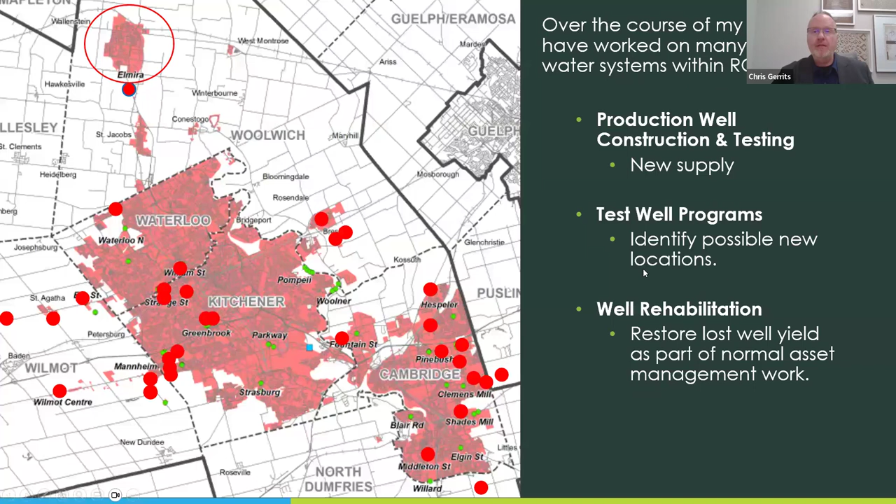With this slide, I just wanted to have 3 takeaways. If the presentation ended right now, this is what my takeaways would be. First off, we need to continue to use the 2015 safety factor in the interim to allow for development to proceed - that's what we all want: unfreeze, lift the freeze, and allow development to proceed.

One of the reports identified a problem being that the Middleton system didn't have the pressure requirements to connect and service the Mannheim service area. So the second recommendation would be to quickly reestablish that connection so you can count on Middleton as a backup, which will help alleviate some of the capacity pressures. The third recommendation would be to continue work that is planned and ongoing to restore capacity and add new system capacity.

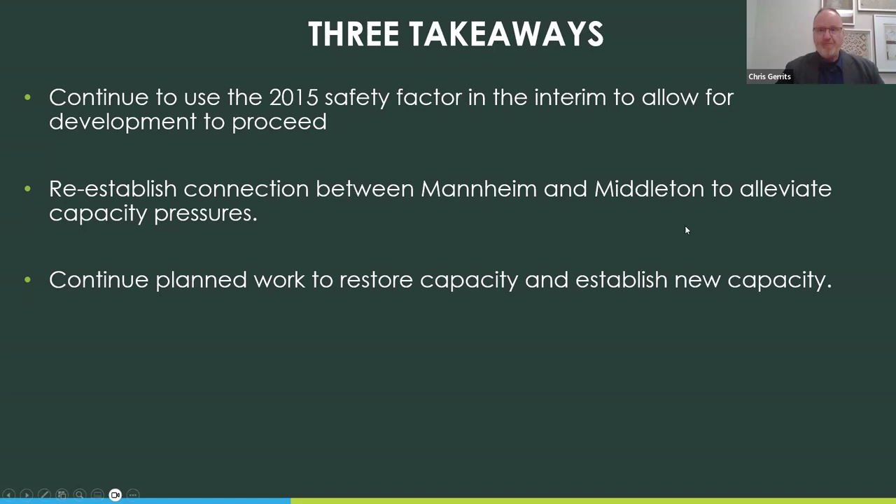Next up, I wanted to talk about the Waterloo system, because there's a lot of messaging going out from various sources that the region of Waterloo water system is one of the most complex systems in the province, country, world - I added that part. It is a very complex system, but the architects and designers of the system designed it that way. It is complex in that it has a number of wells, a number of interconnection points, and it uses some groundwater and some surface water.

But that was the idea - so you don't have all your eggs in one basket, you have options. They've got ASR wells, the aquifer storage wells. They take water from the Grand River when there's capacity, treat it, and inject it into the aquifer to help restore aquifer levels. That is a pretty unique solution, something they're very proud of and should be very proud of. So it is complex, yes, but it's complex by design.

I just wanted to compare the Waterloo system to a number of other systems. The Waterloo Integrated Urban System has a surface water treatment plant, the ASR wells which are the storage and recovery wells, approximately 75 production wells, 5 water treatment plants, and about 153 million liters per day is supplied.

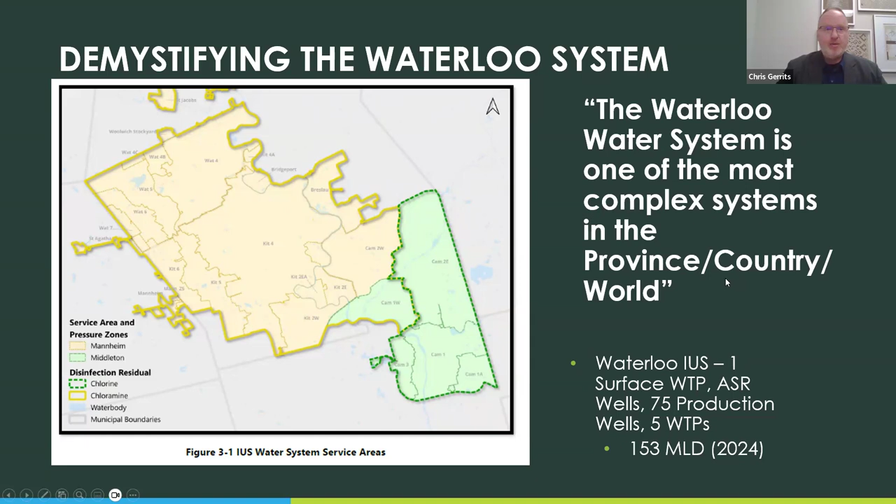When we compare that to York Region, it has multiple surface and groundwater sources. The York water system takes surface water from Lake Ontario, treats and distributes to many municipalities, some of which are blended with groundwater. The Georgina system is a standalone surface system taking from Lake Simcoe, and then they have 5 standalone well-based water systems in 5 municipalities, using about 336 million liters per day as of 2022. So a lot of similar attributes to the Region of Waterloo system.

The added complexity here is there isn't the benefit of a lot of interconnection. You've got standalone well-based systems that, if something goes wrong there, can't cross supply from another system. Georgina is standing all on its own, so it also has a lot of complexities, and it services a much larger population.

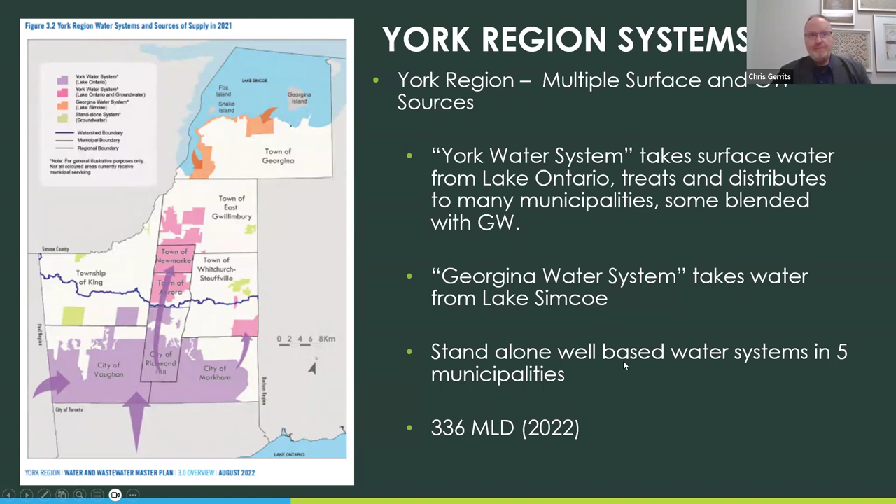Similarly, Peel Region has 2 surface water treatment plants coming from Lake Ontario, one for Mississauga, one for Brampton, and it has 4 groundwater systems - Inglewood, Caledon Village, Caledon East, and Cheltenham - that serve 10 municipalities in the town of Caledon for 599 million liters per day. Again, multiple sources. This one doesn't have the mixing of surface water and groundwater, but it has standalone systems that aren't interconnected, so there's more complexity there.

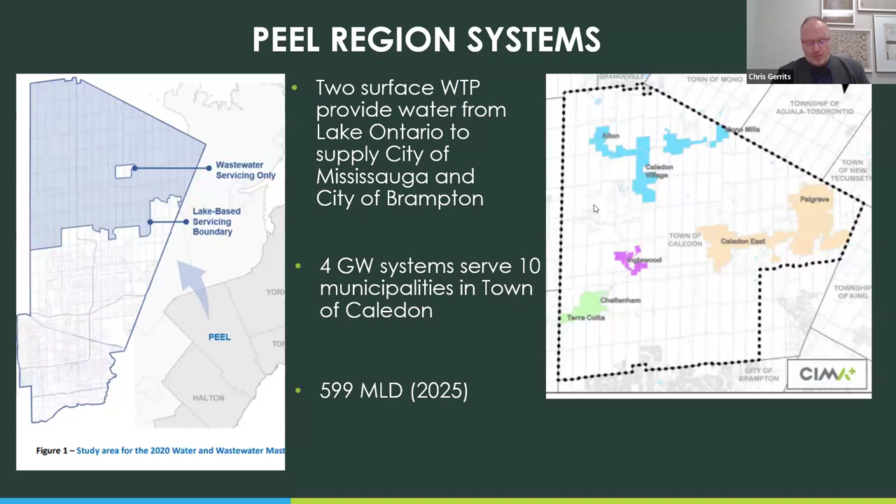So where are we now in the water crisis? In December, the region announced they had a capacity issue. In January, they confirmed their findings through a third-party review. In February, they approved the side stream treatment for Mannheim water treatment plant, which if you're following on social media, you'll see council had a tour of that this week. On April 8th, they revoked the 1980 Wilmot policy, which is good - it allows them to transfer some additional water from the Shingletown wells to Mannheim. But as of today, development is still frozen and no new capacity has been added to the system, although there's a difference of opinion on that, which we can get into later.

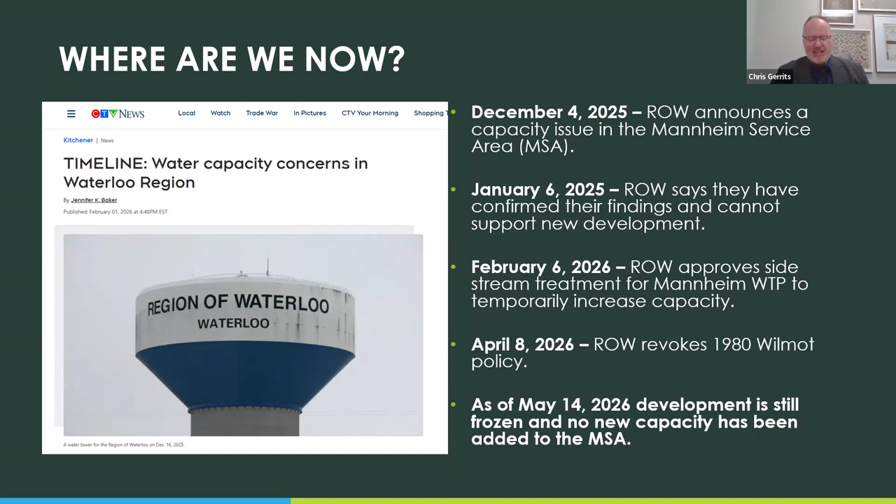I've identified the current issues as 3 separate interconnected issues. The first is the proposed change in water management philosophy. Second are the infrastructure and operational challenges, and third is the local water level concern.

So first, the proposed change in water management philosophy. I use the term proposed because the Region of Waterloo adopted their 2015 Water Supply Master Plan, which contained a philosophy on how they're going to apply a safety factor. At that time, they adopted the required surplus capacity, which said you take your average day demand, add 20% on top of that, and that's what you'll consider your demand for design purposes and to figure out what capacity you have. So you've got a 20% buffer added on top of average day demand as your safety factor.

This graph shows the 2015 Water Supply Master Plan showing a potential deficit by 2051 if they didn't do anything, if they maintained the existing sources at 193 million liters per day with the 20% buffer added. They identified a number of projects to be implemented from 2015 through 2051 to address that, including 20 million liters a day in capacity restorations, the Waterloo North Treatment Plant, and wells to add 6 million liters per day of new capacity, and 2 phases of additional work that would add 24 million liters per day, for a total of 50 million liters per day added by 2039-40, which would result in a system capacity of 243 million liters by 2051 and an average day demand of 236 million liters per day with the 20% added.

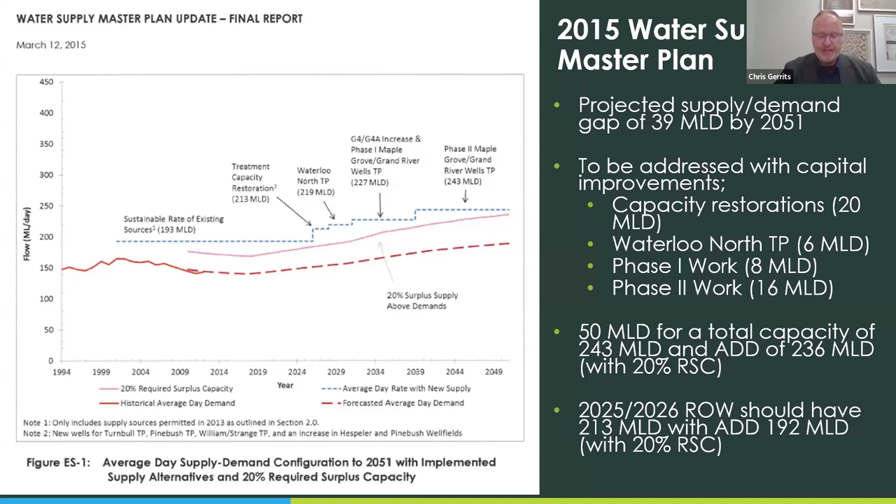To get the sustainable supply capacity, they've taken 21% off of the total system capacity already, based on their interpretation of what actually can be supplied on a long-term basis. Then on top of that, they've taken another 20% off, which was their resiliency factor, which results in a 37% capacity being taken off in this case. So you've got the 21% and then 20% added on, which works out to a 37% reduction in what they consider their operational resiliency versus total system capacity.

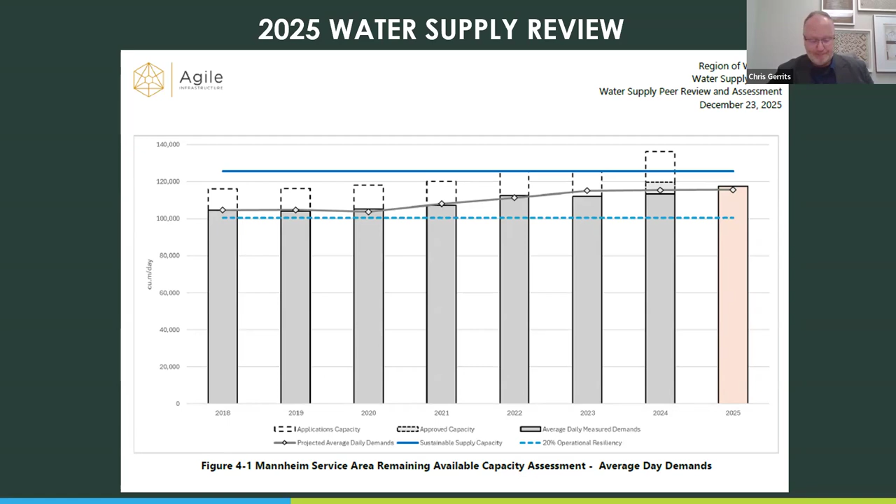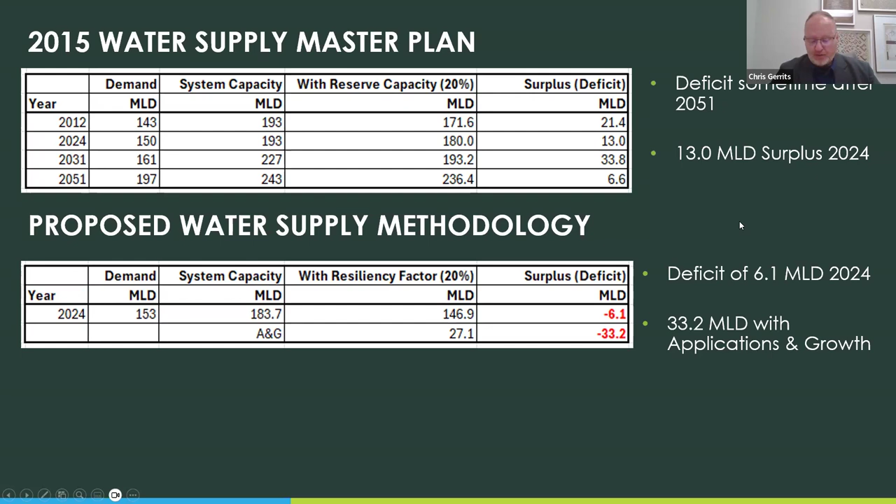So to summarize and compare 2015 and 2025 forecast: the 2015 Water Supply Master Plan laid out a plan so that there would be no supply deficit until sometime after 2051. As of 2024, there should have been a 13 million liter per day surplus based on the projections. The new proposed resiliency factor approach results in a deficit of 6.1 million liters per day in 2024, and 33.2 million liters per day with applications and growth factored in, which is a difference of 46.2 million liters per day. So just using the two different approaches is a difference of 46.2 million liters per day.

The projected demand from 2015 is close to the observed demand, of 153 million liters per day. System capacity is down 10 million liters per day, or about 5.1%. So when you apply the 20% resiliency factor to system capacity, there is actually 18.3%, or 33.1 million liters per day, less available in the entire system than there was in 2015.

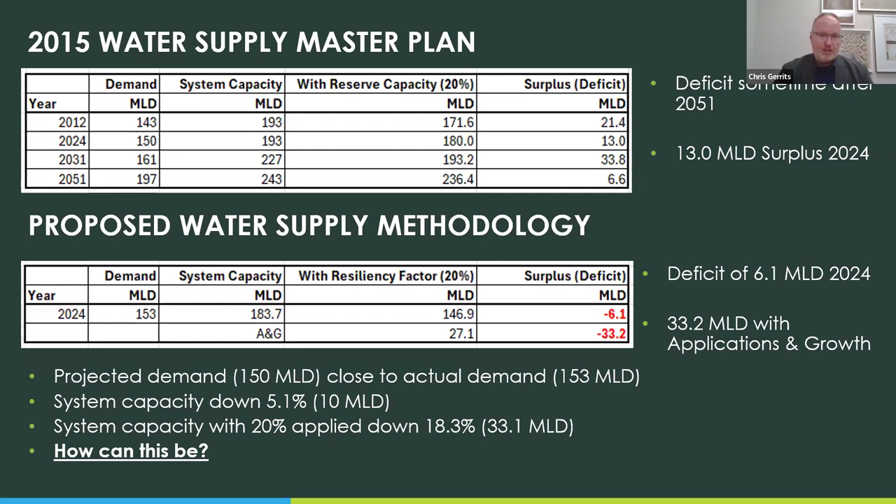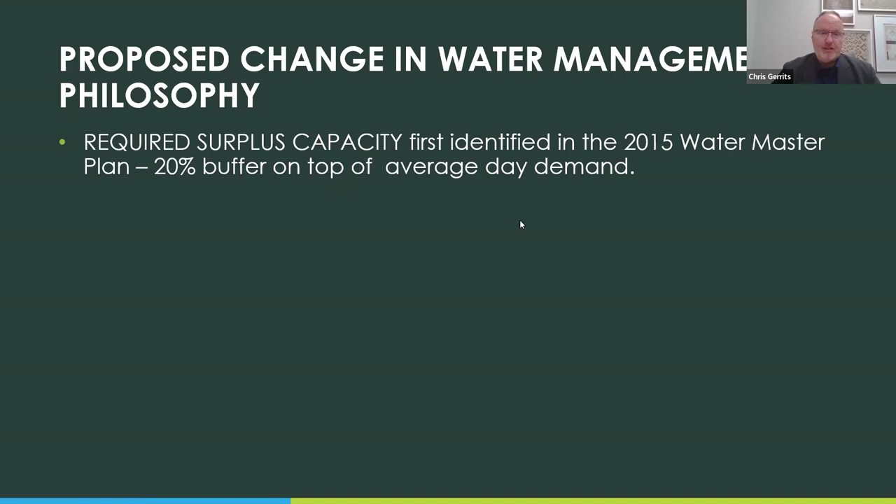So how can that be? We need to look at the change in water management philosophy, or the proposed change. In 2015, the required surplus capacity was simply, as stated before, 20% on top of the average day demand. In the technical memorandum, they identified that they should switch to a resiliency factor, which takes 20% off of total system capacity. So the required surplus capacity adds 20% onto the average day demand, whereas the resiliency factor would take 20% off the top. So it's still 20%, but it's applied in different ways.

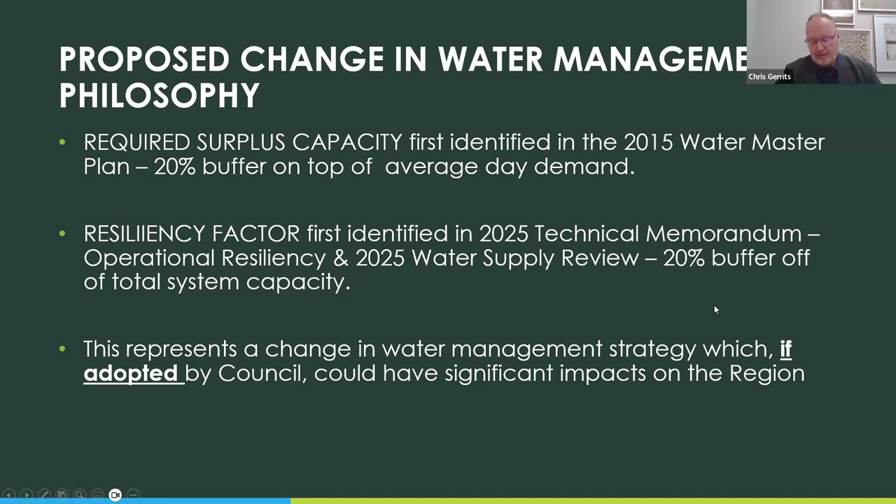And as I'll show in the next slide, this difference, which is still 20%, but the way they apply it, has significant impacts on the amount that's available.

So I'm going to apply the required surplus capacity philosophy and the resiliency factor philosophy to the 2024 demand and capacity numbers, as this is the most current completed published data set. This is public information. So the demand in 2024 was 153 million liters per day. The total system capacity is 183.7 million liters per day.

If we apply the resiliency factor, which is the new proposed methodology, you take 20% off of that 183.7 system capacity. So you end up with a system capacity of 146.9 million liters. Your demand's 153 million liters per day. So you end up with a deficit of 6.1 million liters per day, which is how the whole development freeze was triggered. Council was told we have a deficit on a daily basis of 6 million liters.

The approved method of calculating the reserve, which was adopted in the 2015 Water Supply Master Plan, is you take the demand number, 153 million liters per day, and you add 20%. Your system capacity is still 183.7. Your demand, which is the 153 with 20% added, is 183.6 million liters per day. You end up with a surplus that's pretty much negligible. Not a great situation, but it shouldn't trigger a freeze.

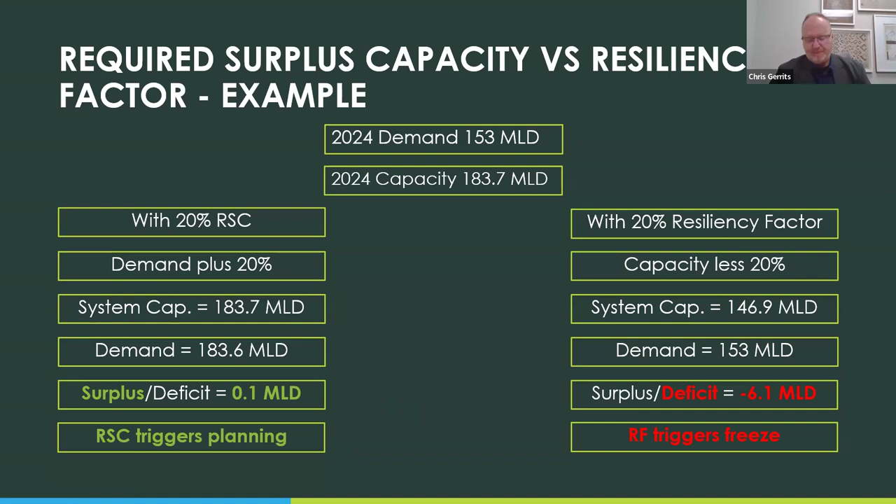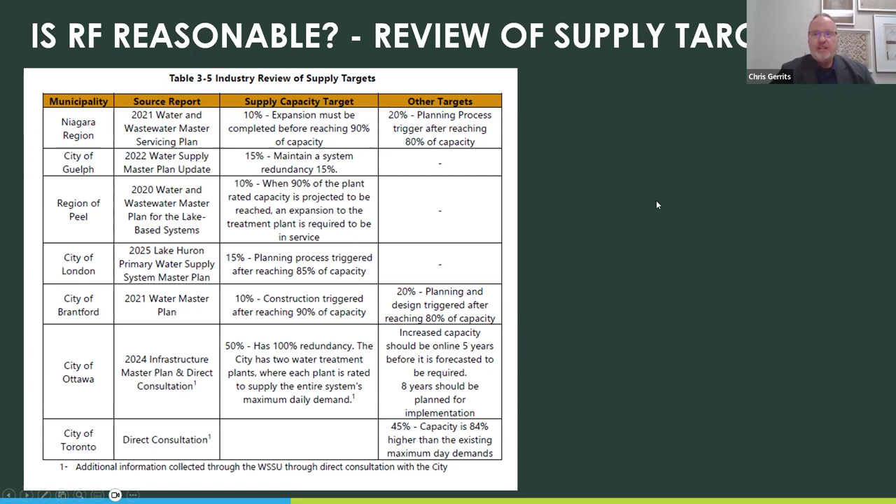So they have a very high redundancy and resiliency factor. So excluding the 100% lake-based systems, we're left with the city of Guelph, which uses 15%, and the Region of Peel uses 10%.

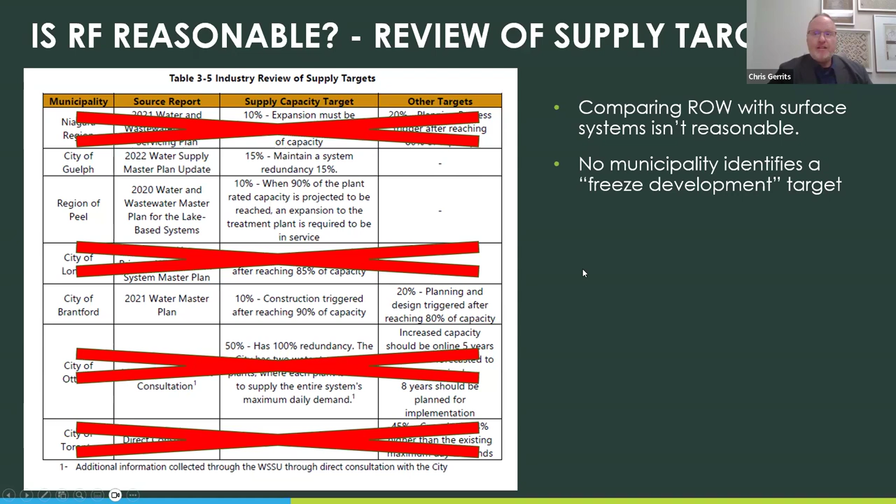So when they get to 90% of the rated capacity, that's when they start the process. City of Brantford starts planning when they get to 20% of the total system capacity, and construction's triggered at 10%, when there's 10% left. So none of them identify freeze development as a target or a trigger.

Typical practice, as stated, is to start planning when you reach 80% of total system capacity, and start construction when you reach 90% of capacity. So with those 2024 numbers that I presented previously, demand is about 83.3% of capacity. So if you were using a similar approach, this is the time that you would start planning to add capacity to your system.

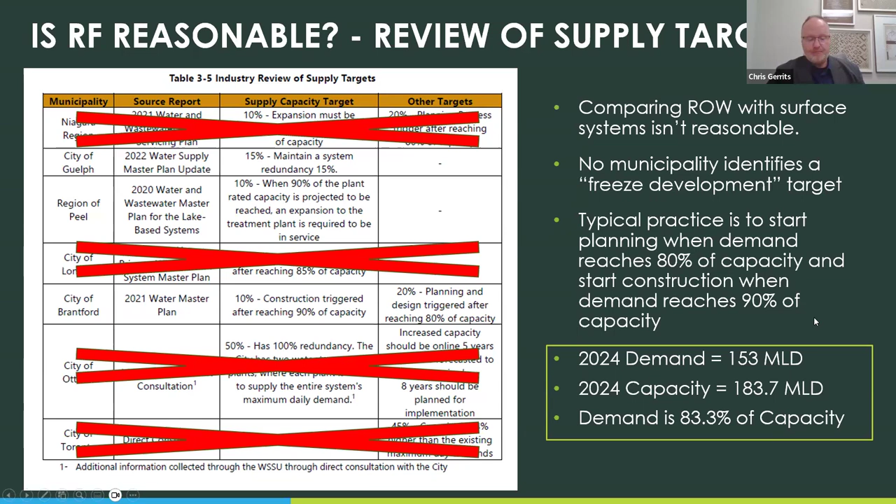So who is right? Well, the Ministry of the Environment guideline states that allocated system capacity should not exceed design capacity of the sewage or water system. So it's a pretty low bar, similar to the building code, which is minimum requirements for building. You can exceed it if you want. It's very similar here - they're just saying at a minimum, don't give out more water than you can provide on a daily basis. So it's well within the powers of any municipality or council to set a higher standard.

Not suggesting the 20% resiliency factor is not a great thing to strive for. It probably is better than the 20% RSC, but the implementation needs to be allowed to be staged in. You can't make that fundamental shift overnight, and as a result, stop all development. It's just not feasible.

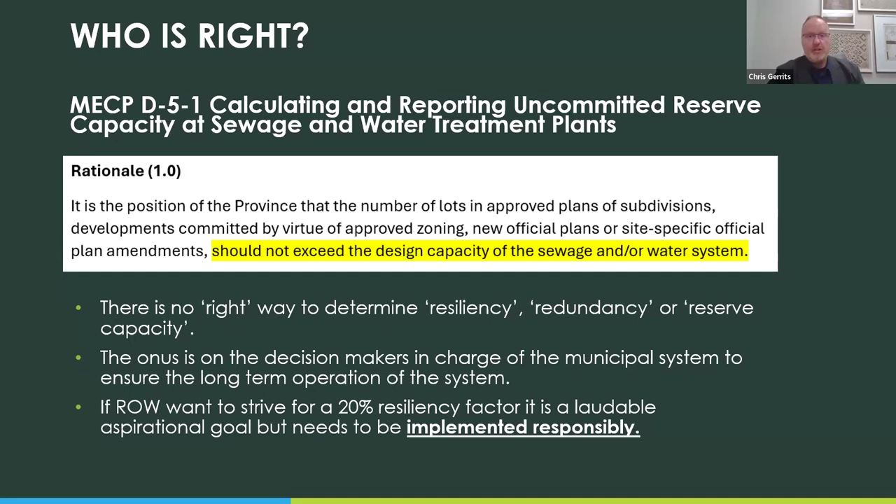So the second is infrastructure and operational challenges. This is going to be a little brief because it's not necessarily my wheelhouse to work on horizontal infrastructure, but I will just touch on some of the challenges.

So the 2015 Water Supply Master Plan identified a lot of constraints, many that were holdovers from 2007. There was a need to increase groundwater supply and a suggestion to update the Water Supply Master Plan on a 5-year cycle. I think that's a good idea, the 5-year cycle, to update the Water Supply Master Plan.

But previously, there was 8 years between their 2007 and 2015 master plan, and we're probably going to be about 13 years in total between the 2015 plan and when the next one is adopted. So I don't know that 5 years is achievable or even really required, but I would agree that 13 years is far too long, because that's the document that sort of identifies big picture what you need to add to the system so that you're maintaining capacity.

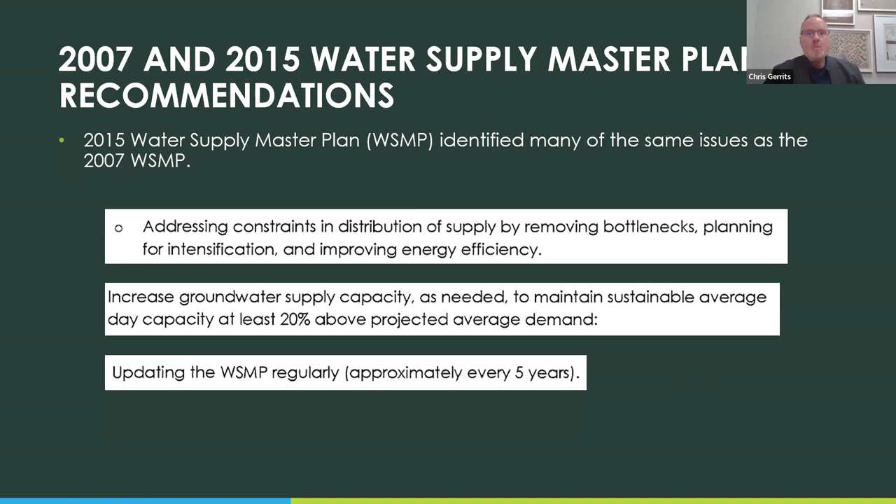The 2015 Water Supply Master Plan recommended 16 projects related to known constraints in the system, 13 recommended for implementation prior to 2031, 2 after 2031, and 1 with no timeline.

So the 2015 Water Supply Master Plan identified the mixing of the water sources with different secondary disinfection methods as an issue. So it was identified and known back then. It's a key part of the 2025 report, indicating that it was not possible to supplement the Mannheim system from the Middleton system, in part due to these differences in secondary disinfection methods.

Also, going back to my explanation of the York system, there are large municipalities in the York system, such as Newmarket, that are serviced with a blend of surface water and groundwater, mixing with different secondary disinfection methods. So it's not impossible. I can say it's not ideal, but there is an engineering solution to solve that. Similar to the pressure differential, there's an engineering solution to overcome that.

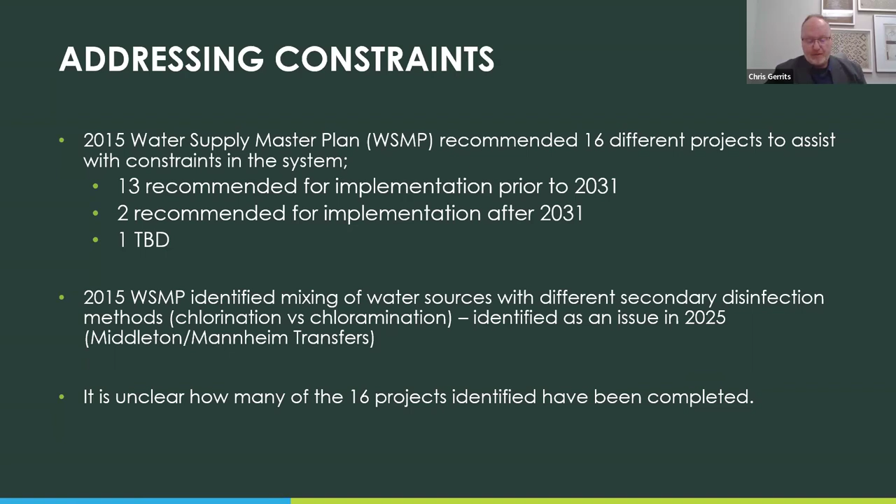It is unclear to us how many of the projects have been completed. We've requested that information numerous times, and it has not been provided to us. So I'm not sure which of the 13 or 16 projects from 2015 have actually been completed.

The next recommendation from the 2015 Water Supply Master Plan was to increase groundwater supply capacity to maintain the 20% RSC. To do that, the region was going to drill new wells to create new treatment facilities. 3 water treatment plant locations were reviewed and decided to proceed with 2.

The second recommendation was to drill new wells and restore capacity at 1 existing treatment facility. It was suggested the region would restore existing wells and create additional new treatment facilities, and all of this work was going to add 50 million liters per day of capacity between 2015 and the 2039-2040 timeframe. So, as indicated in the earlier slide, this would result in a capacity today of 213 million liters per day.

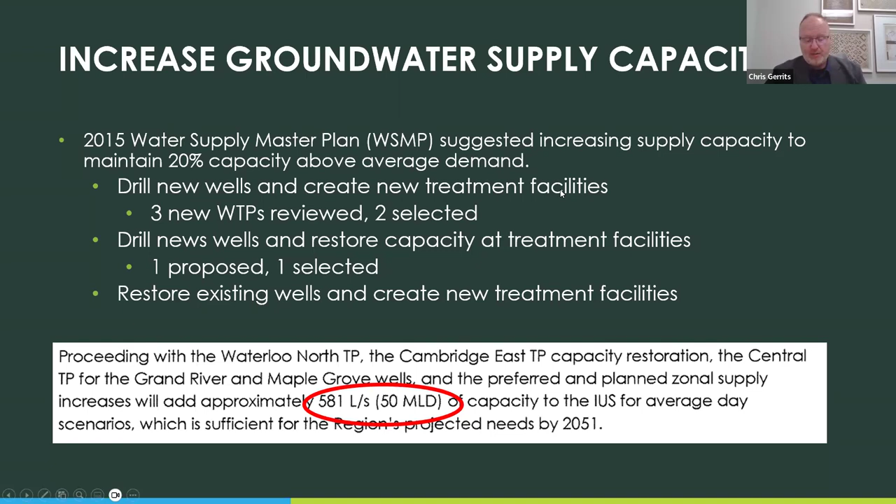Where we currently have 183.7 million liters per day. So we should have a large surplus at this point in time if the recommendations from the 2015 Water Supply Master Plan were acted upon.

So the final issue is the local water level concern, which is probably, in my opinion, the most problematic because it's a more widespread problem in the Mannheim area.

Council has heard from staff that the water levels in some of the wells are reaching a point where they could start losing water supply wells. This is partly due to the fact that they have been operating what they call peaking conditions since about 2019. What they consider peaking conditions are the maximum permitted rates, which they don't believe are sustainable rates. They shouldn't be operated at those rates on a long-term basis. They've been in that situation since 2019.

So I just wanted to touch on what it means to lose a well. It's the term that they've been using. And to do that, we need to look at how the wells in that area are constructed.

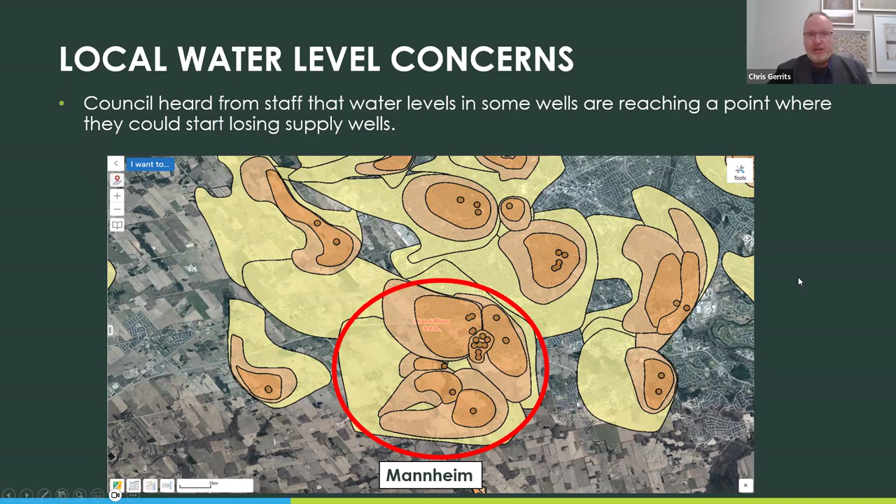So the wells are overburden wells, which means they get their water from the sand and gravel located somewhere below ground surface. The wells are constructed with a well casing that extends into the aquifer, and then a stainless steel well screen is installed. The well screens look simple, just like a screen. It's horizontal slats and vertical supports, but they are actually designed and engineered specifically to retain a certain amount of material in the aquifer and allow fine grain materials to pass, so that you're allowing those pathways for the water to enter.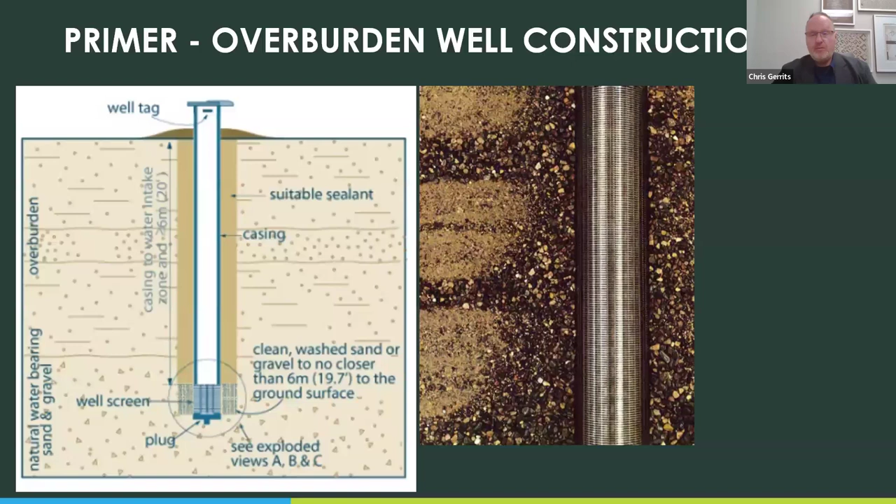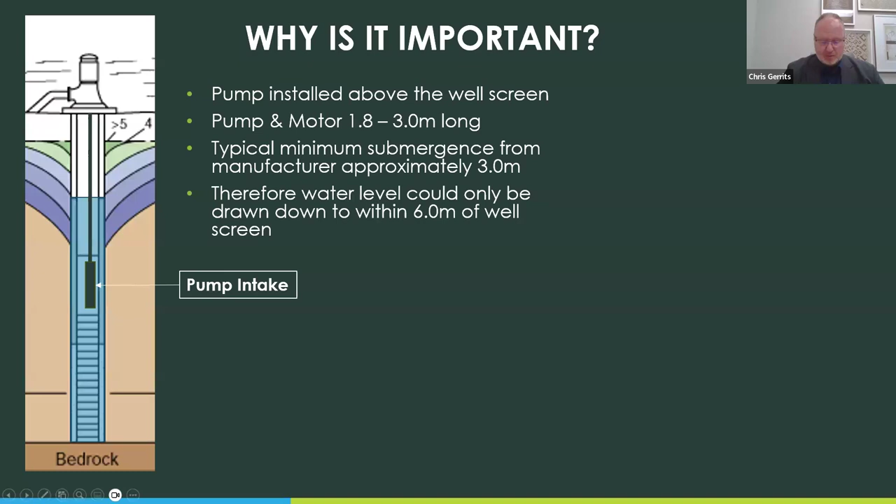It's important because the pump is usually installed above the well screen. Pumps can be anywhere from 1.8 to 3 meters long. They usually have a minimum submergence from the manufacturer of up to 3 meters. So the water level can usually only be drawn down to about 6 meters from the top of the well screen. So it's possible to install a pump in the well, but there are risks.

You can have the increase in entrance velocity, which is not good for the well. It can draw material in. And the screen can actually collapse due to the suction from the pump. Also, if you have the pump in the screen, there will be a point where you'll draw the water level down close to the top of the screen or into the top of the screen.

That allows that adjacent material to depressurize. And when that happens, so in the previous slide, when I showed the sand that's sort of held at distance from the screen, if you drop the pressure in the well low enough, that depressurizes the aquifer immediately around the well and allows that sand to very quickly enter the well, and it'll fill that screen up immediately. So you're in a situation where you have to rehabilitate the well, or sometimes it could just be a total loss. It can be filled with sand. It can lock the pump in there and make it impossible to remove. So that's the reason we don't want to decrease the water levels further in those Mannheim wells.

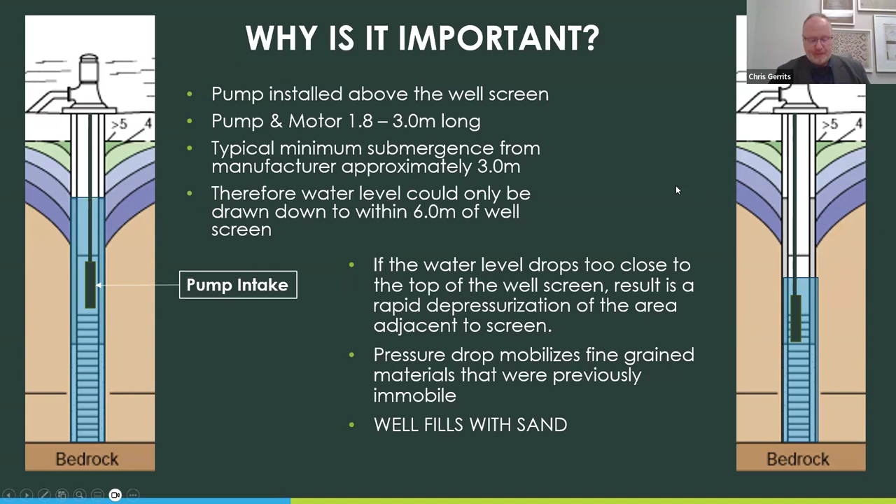So we'll go over some solutions of how we can address the valid concerns that the region has while allowing some development to proceed. So the first solution is always my favorite because it's easy. It's do nothing. It's always an option, and it should be addressed in every analysis as a baseline.

So what would it look like here? You would maintain operations and allocation as possible, continue along the 10-year capital plan. You would allow development to proceed. And if you are seeing issues arise, the region does have tools to reduce demand, such as a lawn watering ban, voluntary reduction from some of your non-residential users. There are a number of solutions there. Not a great solution, but it is an option that is available to the region.

So the region has identified a number of solutions on their website. They include, in 2026, focusing on repairs to existing infrastructure, but there's no new net water capacity.

2026-27 focus on operational improvements at the Greenbrook and side stream treatment at Mannheim, which will add up to 364 liters per second of new water capacity. We'll discuss that in a second.

Then 29 to 32 focus on repairs to infrastructure and add up to 277 liters per second in new water capacity. I'd like to point out, being a little catty here, I don't know what they're doing in 2028. I think they've taken a break there because there's nothing identified.

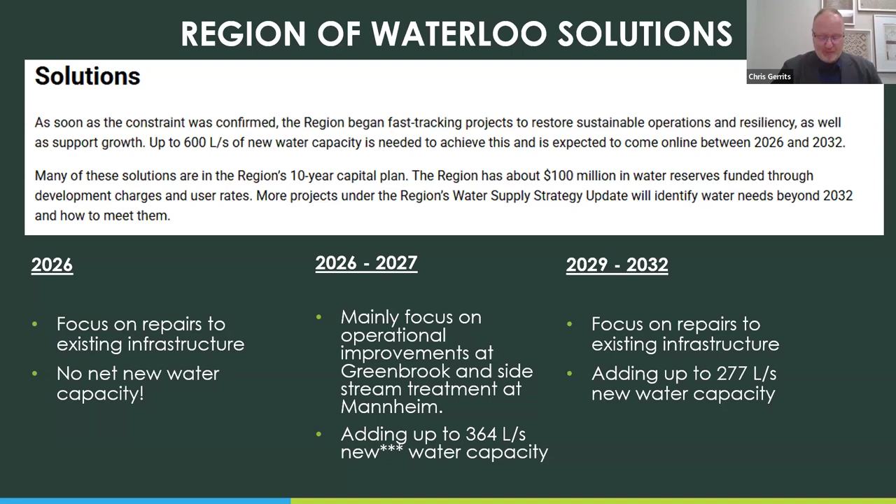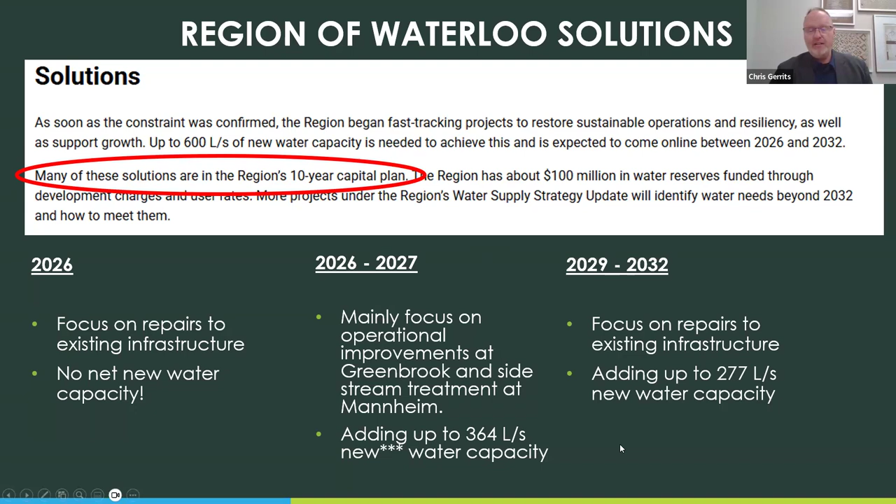But with respect to my concerns with these solutions, first of all, many are already in the region's 10-year capital plan. So I don't know that there's a lot of additional solutions being discussed here. These are all things that have already been identified. In some cases, they're accelerating the pace at which they implement them.

Some other concerns: 364 liters per second of new capacity in 2026-27 is through restoration of capacity that's been lost from the Mannheim water treatment plant. So not really new capacity. I've had discussions with region staff on this. We have a difference of opinion on that. I wouldn't really consider capacity that has been restored as new capacity.

I think their opinion is that it is new capacity because it's a side stream treatment, a new process in the Mannheim treatment plant. But I think realistically, until we're at a point where we are up and exceeding the capacity that at a minimum we were at in 2015, we really shouldn't consider anything to be new capacity.

And many of the projects, as I said, are already in the 10-year capital plan, so I don't know that there's been a lot of identification of new unique solutions. Really the biggest thing is there's little to no tools there to address the development freeze, and many are in the 2 to 5 year time frame, anywhere out to 2027 to 2032. So there's not a lot of ideas on how we can get this development freeze lifted now.

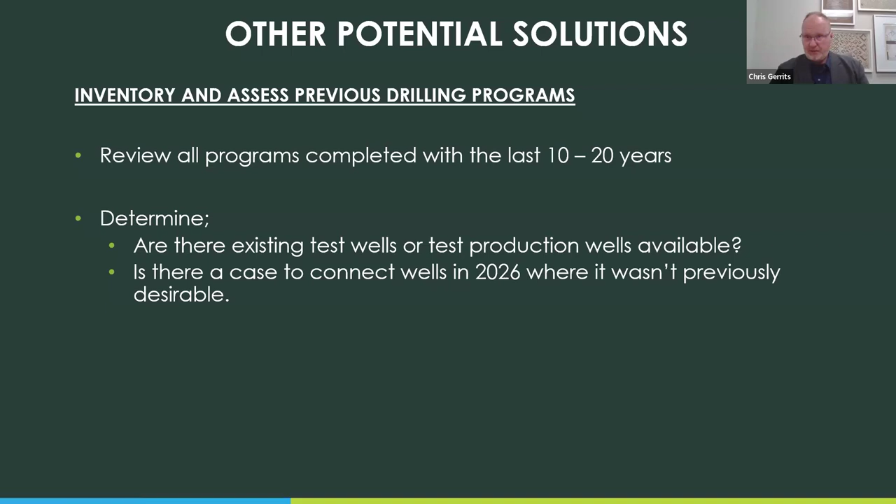So they've also assured me that they've reviewed it and there's no viable wells or locations left unused. So the following sections, I just wanted to highlight a couple that I'm aware of, not to say that they're wrong, not to say that they would fix the solution immediately, just to highlight that there may be some out there that the current staff are not aware of.

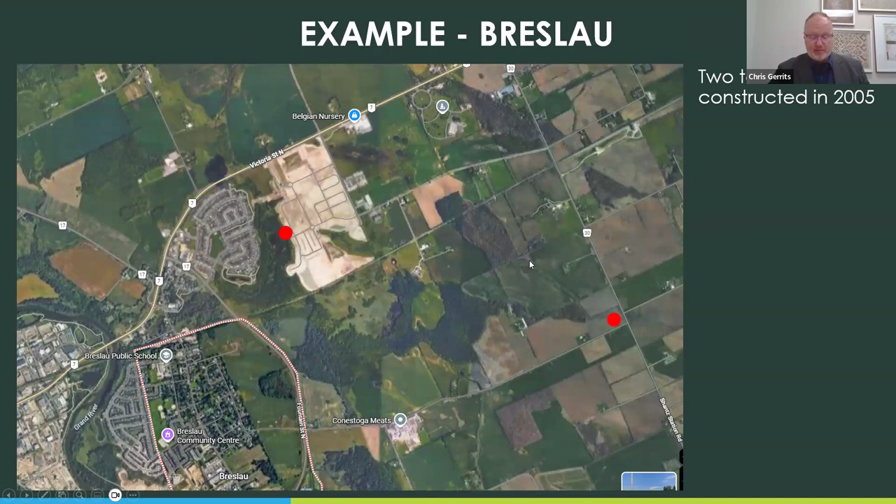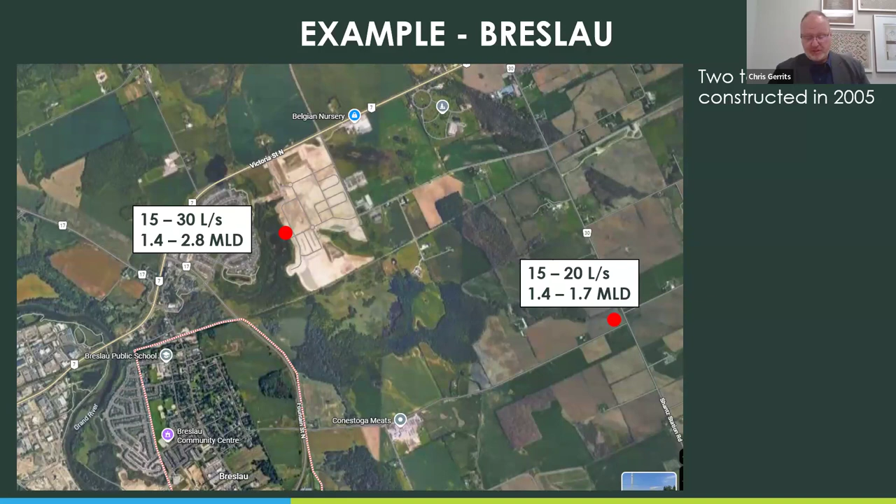So in Breslau, in the area off Victoria Street North and Fountain Street, we constructed 2 wells in 2005. They were subsequently abandoned after testing. The first one tested at theoretical capacity of 15 to 30 liters per second, so 1.4 to 2.8 million liters per day. The second, slightly less, but they were not advanced because the scope of that project was to identify locations for future expansions. They weren't needed at the time.

Another example is a large production well constructed in 2006 at the Portuguese Club of Cambridge, a 12-inch diameter production well in the bedrock aquifer, rated for 5.4 million liters per day. And it's currently still there, sitting unused. I'm not sure if staff are aware, if there's been any assessment of that.

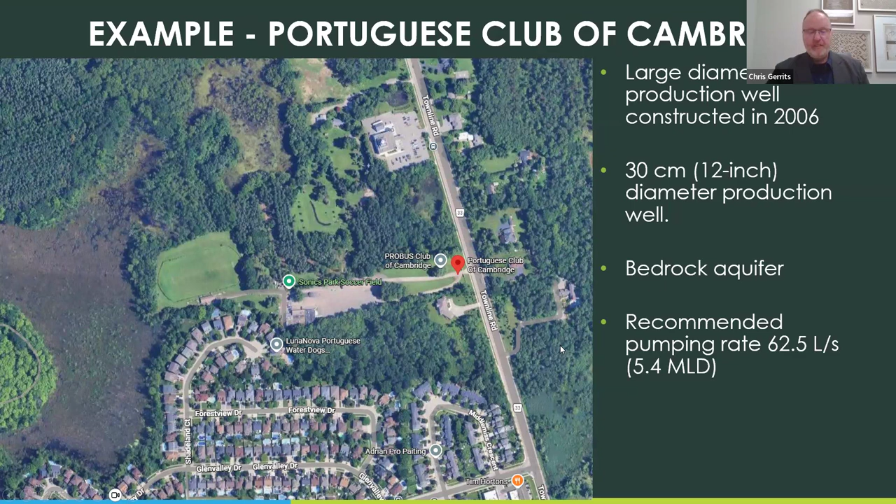We did this at the same time that we did a well just south of there on Cedar Brook Court. That well was connected to the water system. The well at the Portuguese Club at that time was not connected. Oh sorry, there's the well location there.

We did some test well drilling in Gzowski Park in the overburden aquifer. This is part of the Strange Street well field, at the corner of Westmount Road West and Chopin Drive, constructed in 2011 in the overburden aquifer. Preliminary results indicated it would be around 7.5 liters per second. And again, that test well was not converted to a production well, and it hasn't been used.

So those are just to highlight some opportunities. Not necessarily that they should act upon those ones, but to do a bit of a deeper dive into everything that's been done over the past 20 years to see if there are other similar locations that are easy to develop.

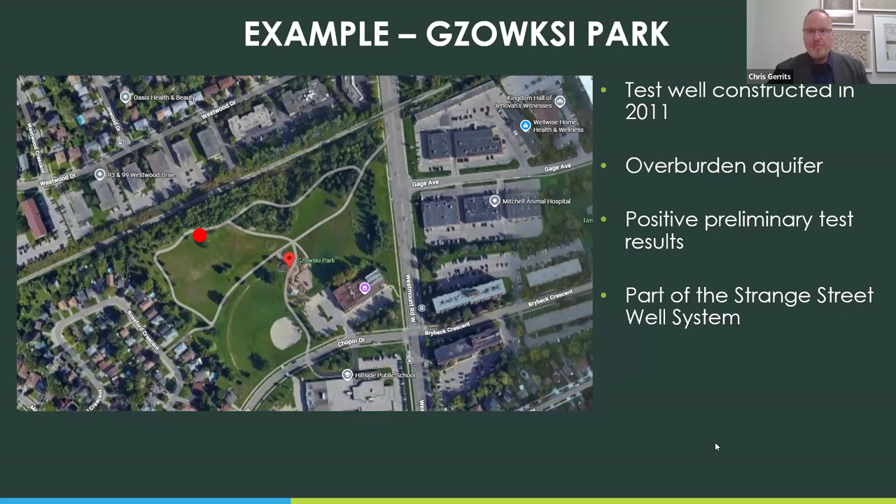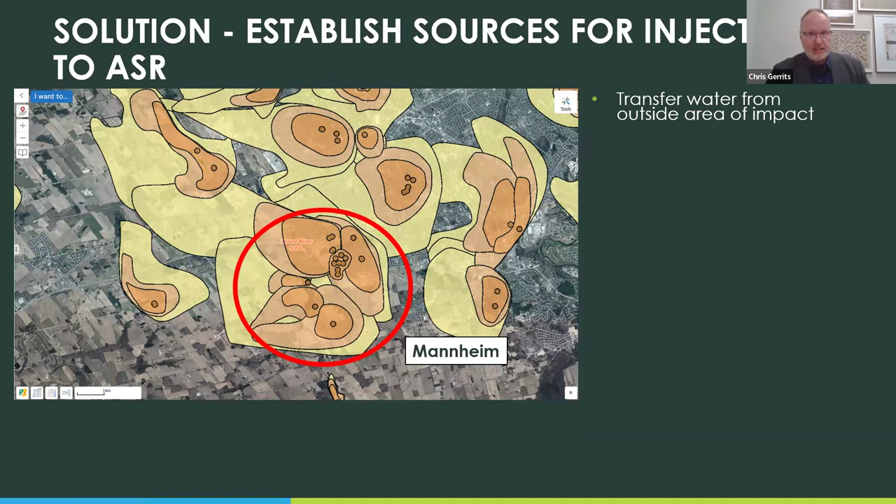So the next potential solution is to the low water level concern around the Mannheim system. One suggestion would be to establish more sources to inject water back into the local aquifer through the ASR wells while maintaining the pumping at the Mannheim wells. The wells would be established outside of the low water area concern. Water would be piped to the Mannheim system and injected into the ASR wells to address the low water threat.

It's a potentially rapid response to help address the low water threat. There's some question through source water protection as to whether or not those wells would be required to go through the source protection plan process.

I'm of the opinion that they're not. Source protection is to protect municipal water supply wells. These wells wouldn't be supplying municipal water. They would be transferring water from one area in the aquifer to another area and injecting back into it. I've had high-level discussions with the Ministry of the Environment, and they were interested, but they weren't able to offer an opinion as to whether or not source protection would be required.

So a couple areas that are possible would be additional wells in Shingletown and St. Agatha, as they already have infrastructure to connect the Mannheim system. If we look at St. Agatha and Shingletown, a large diameter test production well was constructed in 2010 in the overburden aquifer with a recommended pumping rate of 9.5 liters per second.

So that's one area. It was never connected to the municipal system. And that's a potential area where if the well is still there, there's infrastructure pipeline available to pipe the water to the Mannheim area, and you could potentially have some water to inject back into the aquifer.

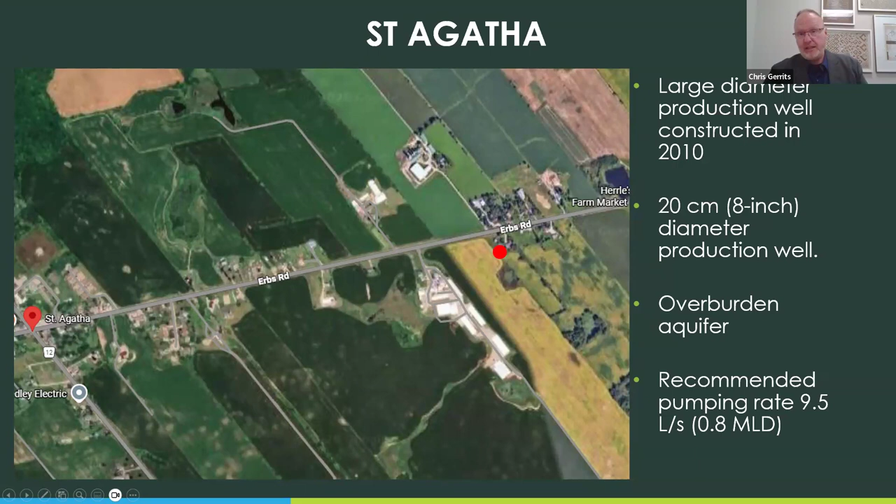Shingletown, there's 3 wells located here, which are K50, K51, K52, potential to produce over 150 liters per second in the overburden aquifer. It's outside of the urban area, and there's lots of potential in the outlying areas around this Shingletown well field to put in additional supplies. There's the water main right along the road there that goes to the Mannheim system. So you have infrastructure, you have an aquifer with what appears to be ample supply. So that is another solution.

And with the revocation of the Wilmot water policy, that is doable. Just wanted to highlight as well that I'm not recommending that as a potential long-term solution. If you're doing this, it is to help the low water condition in the Mannheim wells in the near term, while other work is being done to address it in the long term. So it's not a permanent solution. Doing that on long term could lead to some low water issues in other areas, but if you were able to do that over the next couple of years, it would help with the overall system pressures.

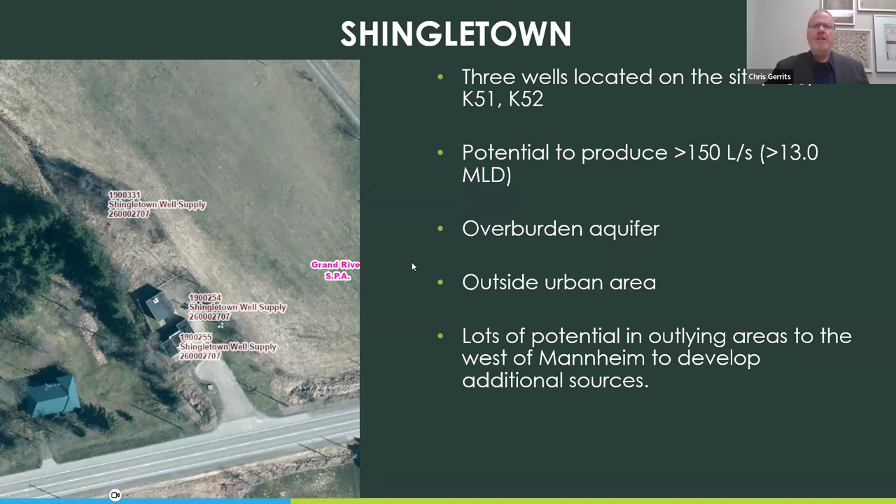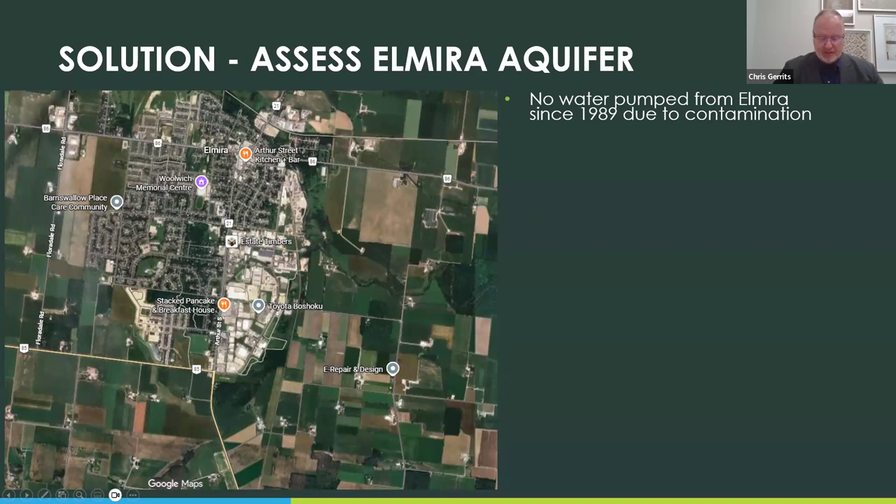Another one would be, and I'm going a little outside the box here, is to assess the Elmira aquifer. There's been no water pumped from Elmira since 1989 due to contamination. It was originally anticipated that the water would be remediated sometime around 2028. I believe that's when the remediation order is done, and they may need to reassess. But there's been some rumblings that with advancements in treatment technology, there may be an opportunity to meet that 2028 timeline.

Waterloo has a well E10, which is connected to the Waterloo system south of Elmira. It's not currently being pumped. It's capable of producing, I believe, 75 liters per second. And I feel like there should be some exploration around whether or not it is time to resume using the E10 well. There's also a former Elmira well located here at 15 liters per second.

This well is currently used on an ongoing basis for pumping and treating. They pump the water, it's treated and injected back into the aquifer as part of the remediation process. And then there's been a number of pump and treat wells that have been installed over the years to help with the plume. We constructed these wells in 2014 to supplement wells that we constructed in the mid to late 90s.

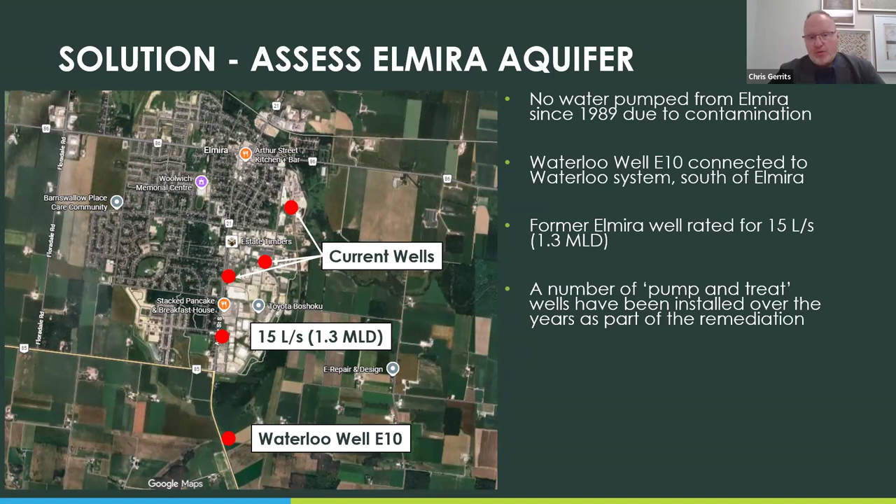Each of these wells can produce in excess of 10 liters per second, so there is opportunity there. I think it's worth discussing especially the well E10. Initially it was no longer used because there was concern that using that well would draw the contaminant plume closer to the Waterloo system. It's a valid concern, but with the positive situation we're in now with the remediation efforts, I think there's opportunity to start using that well at some rate and monitor the area to see if there are changes to the plume.

And if there are changes and it starts to be drawn towards the E10 well, that can be a trigger to reduce that flow or remove it. Again, results indicate there could be a well field approach there with a number of wells installed producing 10 to 15 liters per second.

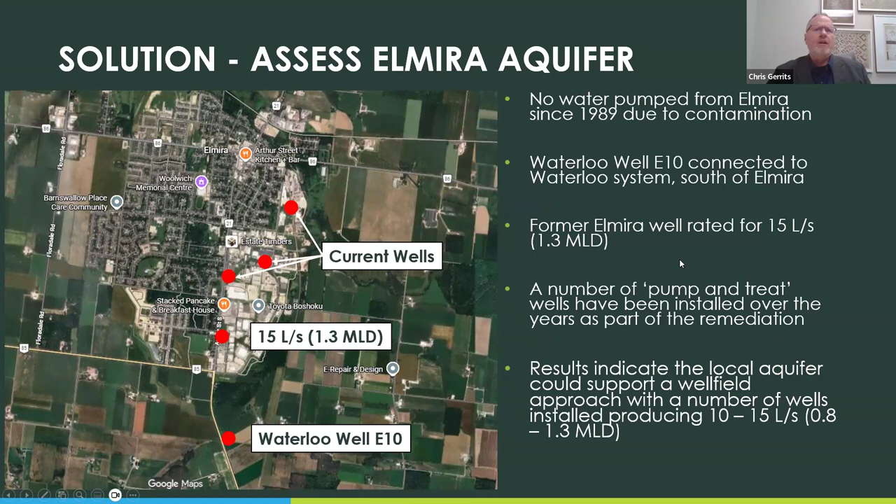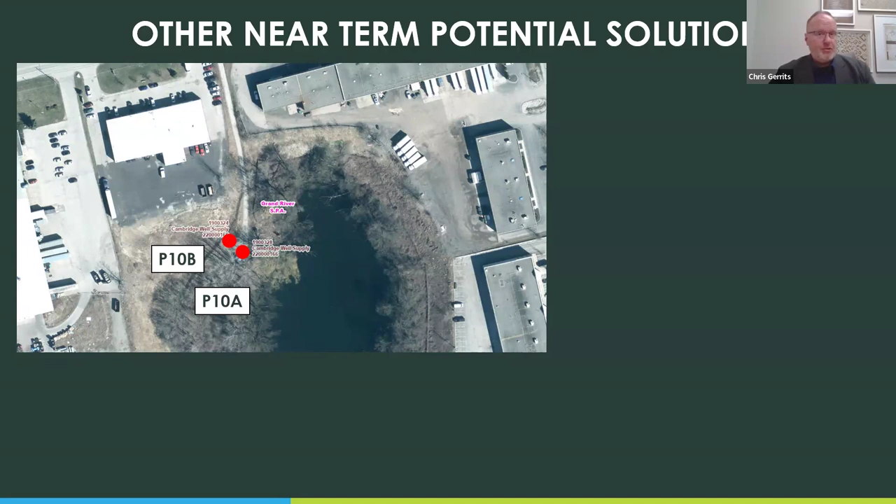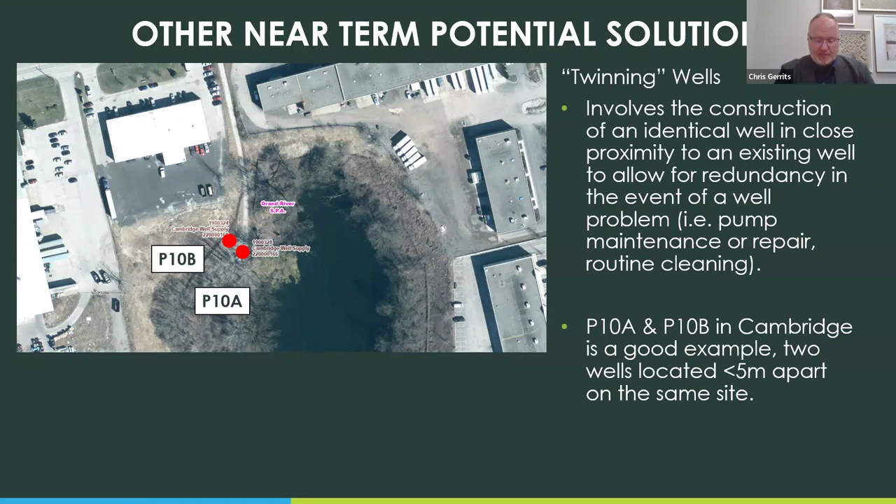One other near-term solution involves twinning the wells - constructing identical wells beside each other, so that if there's a mechanical issue with one well, you can use the other, and you don't lose capacity overall. P10A and P10B in Cambridge are a good example - two wells located less than 5 meters apart on the same site. The advantage is that it may not require a Section 34 amendment, the source water protection study, since wells in close proximity that aren't increasing overall system capacity typically don't need it. A backup well in this case doesn't require that study, which can take 18 to 24 months. The disadvantage is it might not add more capacity overall, since treatment would still be the constraint, but it would give some level of comfort and redundancy within the system.

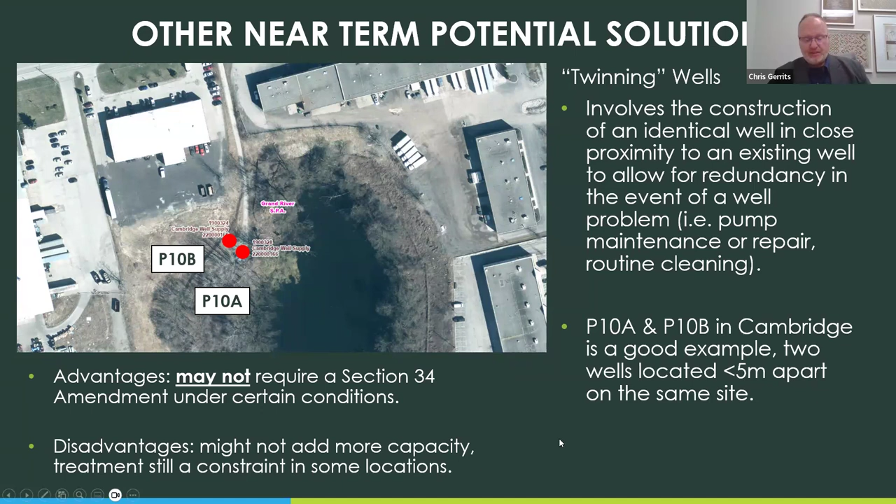Another solution is to increase well exploration. The Region of Waterloo, 20 years ago, had a very robust and aggressive drilling program where on an annual basis they were doing a number of exploration projects. It should be revisited with a focus on locations on the fringes of the current limit of development, and there's an opportunity to work with the development community to identify lands that might be available for testing.

One of the big delays on the municipal procurement side is, first, the tendering process, and second, negotiating land access for drilling. So if you have somebody in the development community who would be a willing host, my suggestion to the region was to allow that developer to use a contractor the region is comfortable with, using the region's typical scope for test drilling. There can be communication between the developer and the region, but let it be developer-driven - the development community can make things happen a lot faster. There would be a conversation about how those costs would be shared, but operate it through the private sector.

Crozier does a lot of developer-driven infrastructure projects for that reason. Municipalities, especially smaller ones, prefer it - it's less work for them, they get input, and at the end of the project they take over that infrastructure. So I think that's another solution.

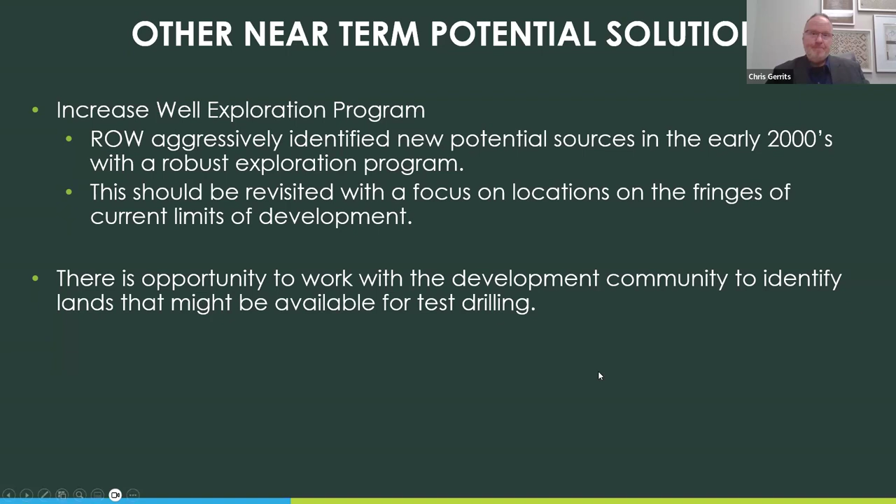So what do we do now? I think first is to advocate for council to continue using the 2015 calculation from the Water Supply Master Plan for reserve supply capacity, allow development to proceed, and if they want to change the water management philosophy, they need to phase it in over a reasonable amount of time. I think they need to look at innovative, outside-the-box solutions - artificial recharge wells, as I mentioned, could be possible. A complete comprehensive review of any unused test wells and test production wells, and possibly even ones taken offline in the past. Then a review of the Elmira aquifer system, continuing test drilling programs and exploration for long-term sources, and really ensuring that recommendations from previous master plans are acted upon.

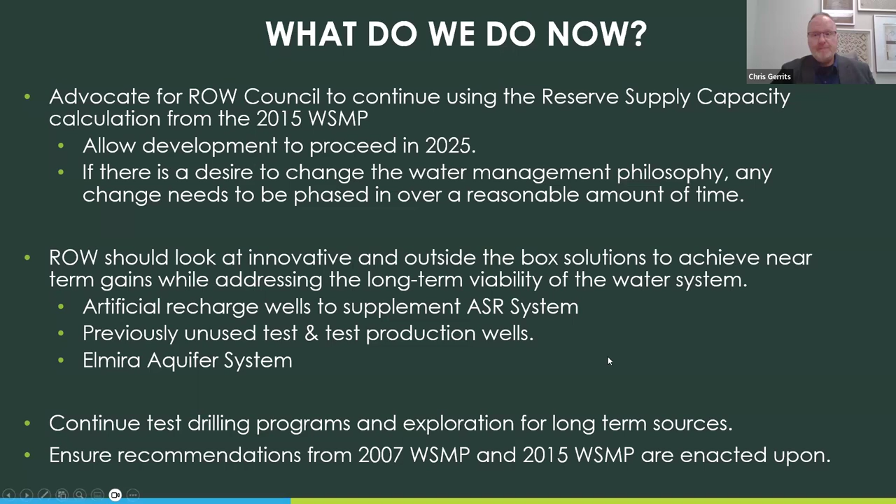So with that, I think that wraps up the rapid fire presentation. Just wanted to ask if there are any questions.

Chris, thanks so much, you're a very gracious subject matter expert. I don't know if it kind of points back to maybe neglect, maybe leadership. On behalf of the Grand Valley Construction Association and other associations, we're taking a scientific approach, no question about it, but we also have a bit more finger pointing than you do. So good for you for keeping it at that level.

One question is, with the math that you've created, is that based on public information, or is there information that the region has that you don't, that would make that report even more fulsome? Do you have enough information to be confident with that? And is there anything that the region is withholding?

I would say that I'm comfortable with the information, so it's the 2024 data. At this point, 2025 data could probably be found. I would venture to say there hasn't been a huge difference in the average day demand from 2024 to 2025, so I'm comfortable with that. On that side of things, I don't think the region has been withholding anything.

I think our difference of opinion is how they and I perceive what the total system capacity is. I take the total system capacity as the permitted rates of all the wells. As I mentioned, they take that total system capacity and at times they consider a reduction of the total maximum capacity to allow for what they consider to be sustainable capacity. So we have a difference of opinion there. I don't think either of us is right or wrong, it's just how you look at the system.